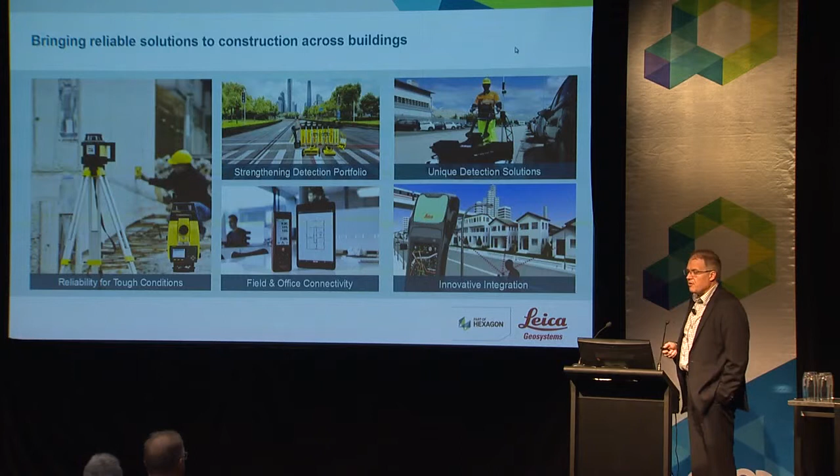We have a significant and growing business in the building construction market, particularly in North America and in Europe. So rotating lasers is one of the areas. We have small measuring devices, distos, and a line of total stations and software that we'll talk about in a minute that is also unique to building construction.

We are in the heavy construction business, so machine control as well. And really one of the most exciting things for me is the opportunity to get involved in some of the disruptions in the building market and to engage with the customer set that I've been working with my whole career around the building construction market there.

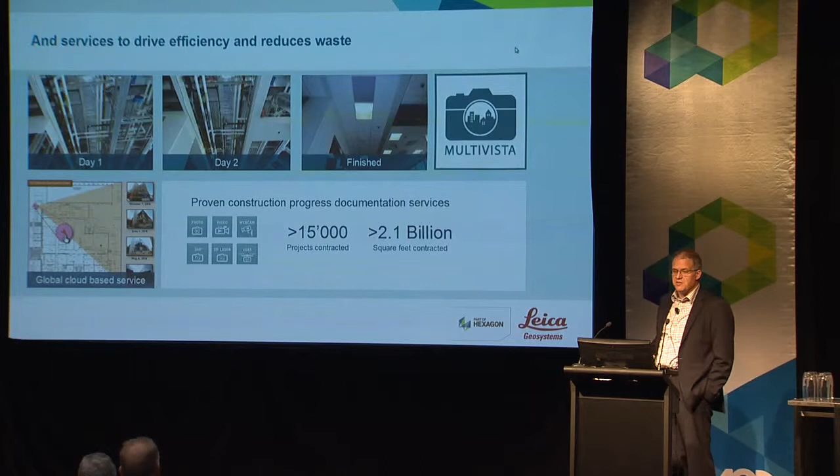We have other companies like Multivista, a sister company that does construction documentation and captures reality in different ways through a set of services. And I mentioned one of our sister companies, PPM, has - you may start hearing about things like Hexagon Smart Build, which is a little bit of a building-oriented product as well.

So that's enough about us. We are partnered, Leica Geosystems is partnered in Australia with C.R. Kennedy. And really the team that I would point you to here locally is on the right here, so the team from C.R. Kennedy. I would encourage you, if you have interest in talking to Leica Geosystems, then please talk with C.R. Kennedy. They're our reseller here locally.

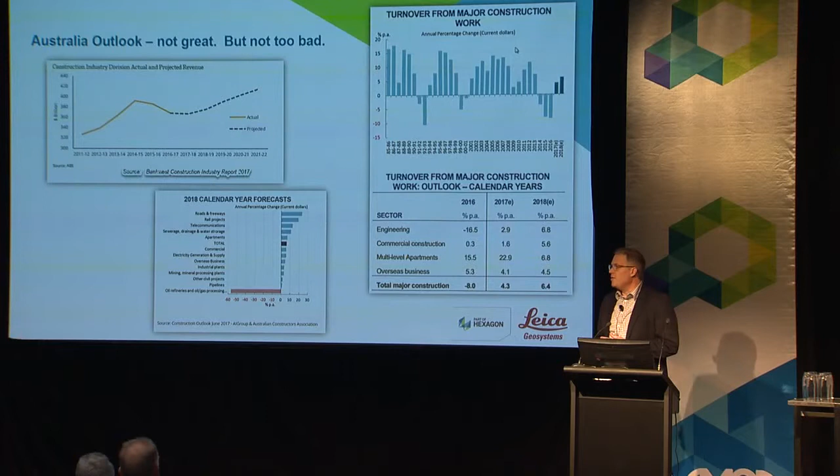So what's the challenge we're talking about? What's the need for smart change, and what's the challenge particular to the Australian market? I've tended to look, especially since I lead the North American business, at the particular challenges of the North American market. So in prepping up for this talk, I got a little bit of a study into the economics of your market down here. It was interesting, just in North America, I'll talk about that market a bit.

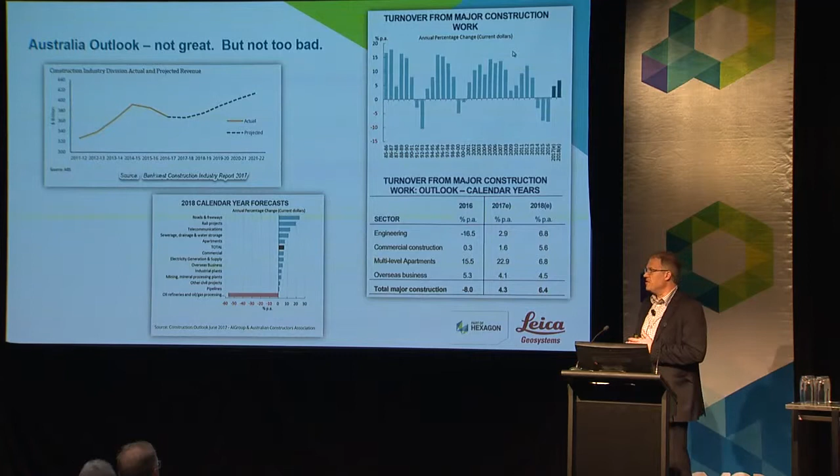The building construction business is going full steam. Tyler talked about the amount of backlog they have. Most builders you talk to in the US are so covered up with work they don't know what to do with themselves. The challenge, of course, is around finding enough labor to do that, and we'll talk about that a bit.

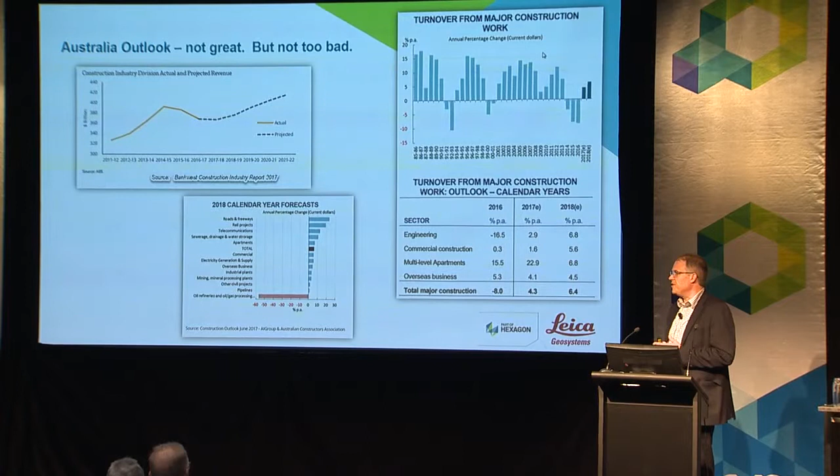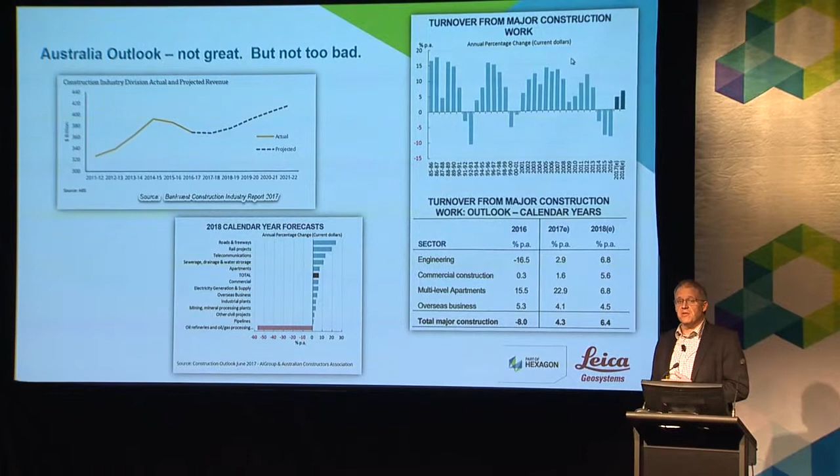I found some confusing notes on the Australian market. One report showed real concerns about the residential high-rise market, but others show it's not gangbusters like maybe it is in the States in terms of growth patterns. We were coming off a pretty bad several years, so we have a lot of backlog of demand there, but it looks like you're growing, and growing consistently. Looking around Melbourne, I noticed a number of cranes in the sky, and it seems like quite a healthy building market moving forward.

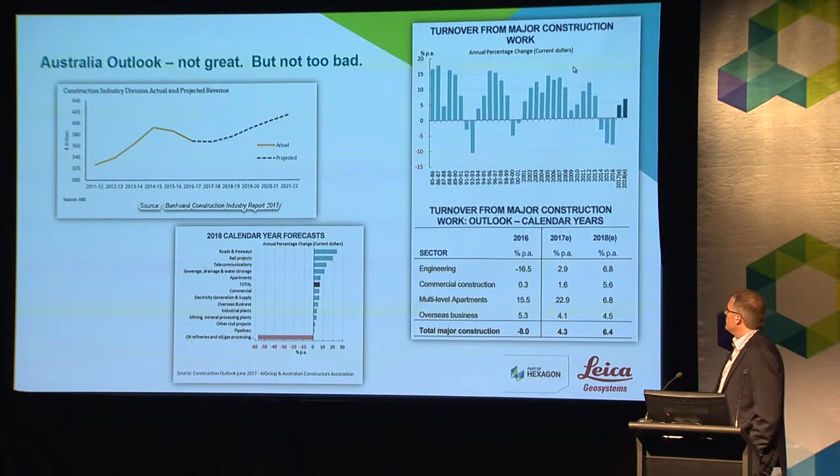Paul Teicholz had studied this a couple different times, in 2003 and again in 2013. Then it was looked at across the mature economies, and it seems to be a pretty consistent theme across these economies that we're not getting the levels of increase in productivity that we get in other industries.

And then this 80-20 rule usually is 80% of the progress, 20% of the work to get 80% of the progress, what have you. This goes back to the point that 80% of our major capital projects, at least according to the reports we've seen, tend to go over budget.

I know we're suffering from that in the Southeast US with a couple of nukes that are now getting shut back down because they were so far over budget. And they tend to run at least 20% over time as well. We know that, and I'm just going to say maybe we do have a problem in this industry in terms of how we approach things in the field.

We know it's hazardous to the people. It can be. We've made great progress over the last 20, 30 years in terms of bringing that hazard level down. But I think maybe even more concerning, is it's hazardous to the health of the organizations that are involved in this business.

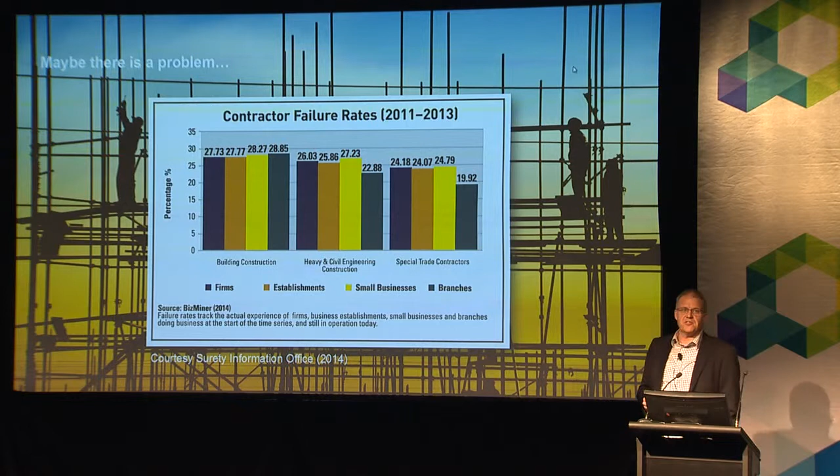This study I saw pulled some data from BizMiner. It's from the Surety Information Office, which I believe is a U.S. entity. It showed that over 2011, 2012, 2013 - not a bad time to be in construction - the failure rate was between 1 in 4 and 1 in 3 construction firms, offices, whether larger or smaller firms. There's a really high failure rate in the business. And the question is, why is that?

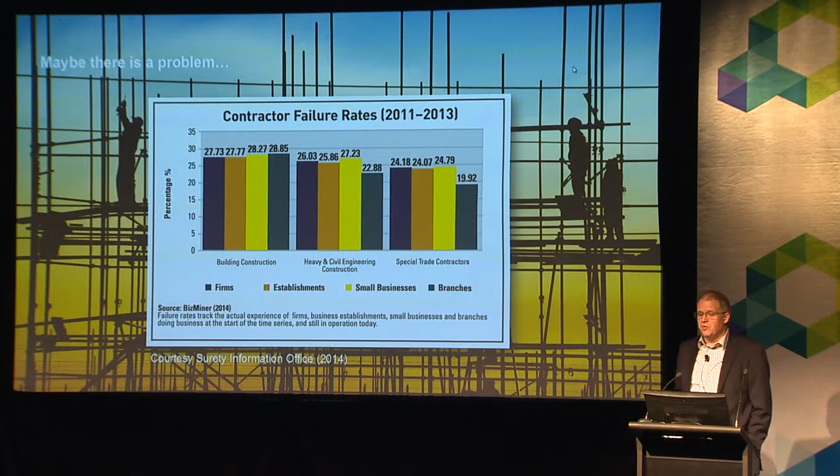So maybe we do need to think about shaping a smarter process. The World Economic Forum with Boston Consulting Group has done some studies of what they believe are the megatrends facing the industry, and I don't want to go into all that. It's an interesting report - I encourage you to download it and read it. I think it's freely available.

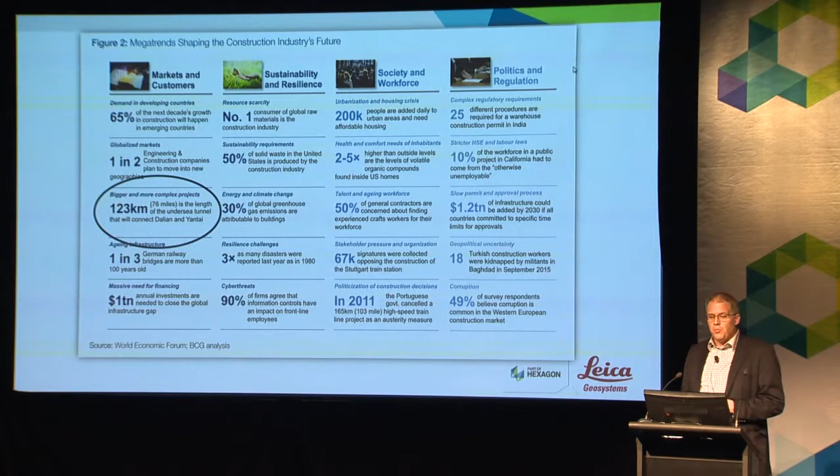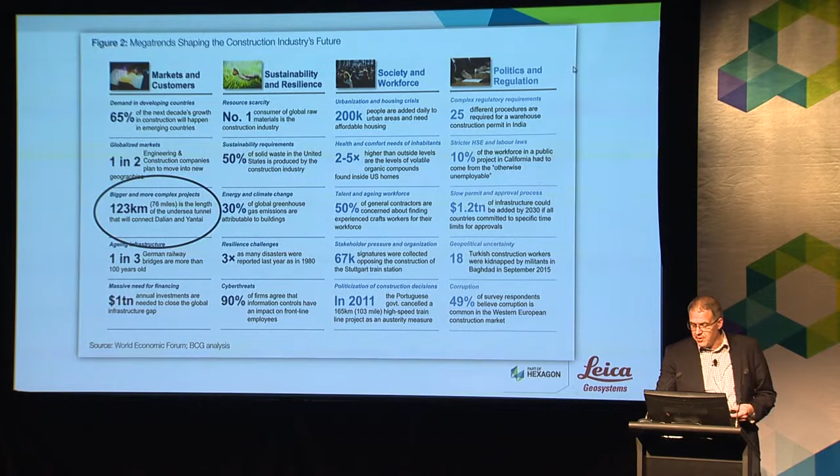But a few things I would point out - I've seen it with the projects that have been presented here. Larger, more complex projects certainly are part of the norm in this business, and it's getting more and more so - like the really impressive project you talked about up there in Brisbane.

Resource scarcity - we're the number one consumer of raw goods, and I'm going to add to that the labor scarcity. So in spite of the fact that maybe we're not growing in some markets as fast as others are, how many of you are concerned about where you're going to get your skilled workers in 5 years? Nobody concerned about that?

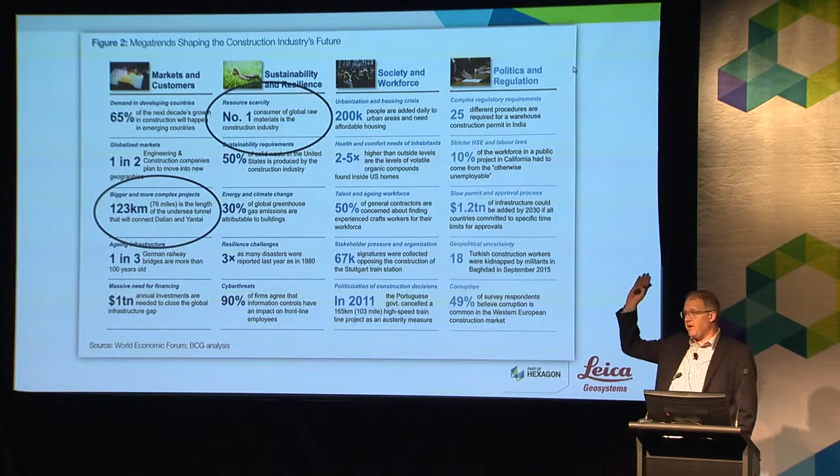In the US, you ask that question, about 85% of the hands are going to go in the air. 4 or 5 years ago, wouldn't have gotten the same kind of response.

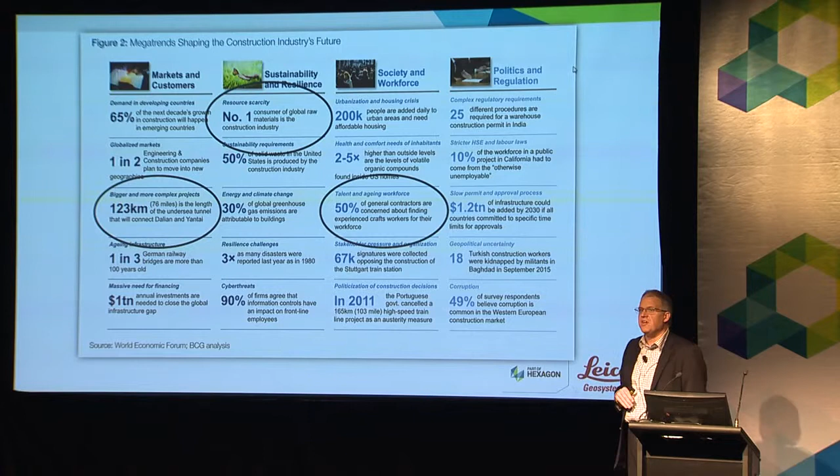So I'd say something to watch is, where are we going to get the resources to actually build that next generation of projects? And that's right here in the aging workforce. About 50%, actually the number this year was like 72% of GCs were concerned about that. I was talking to one of the major contractors in the States that was tracking their average workforce age, and they said it was going up by 1 year every year.

Houston, we have a problem. Actually, that sounds bad these days because Houston does have a problem. They're covered in water, but we have a problem.

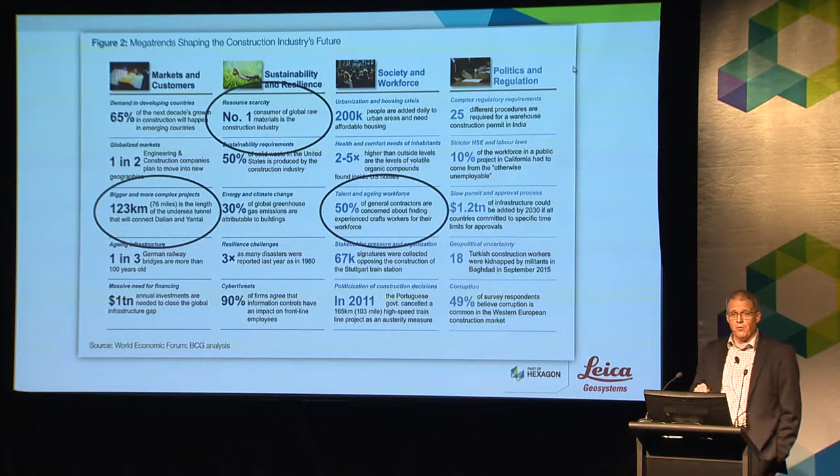If that's going up at that rate, because they also analyzed and saw that 50% of their workforce, their skilled engineering and skilled trade workforce, would be retiring in the next 5 to 10 years. So they were looking at a cliff of what's going to happen with their workforce.

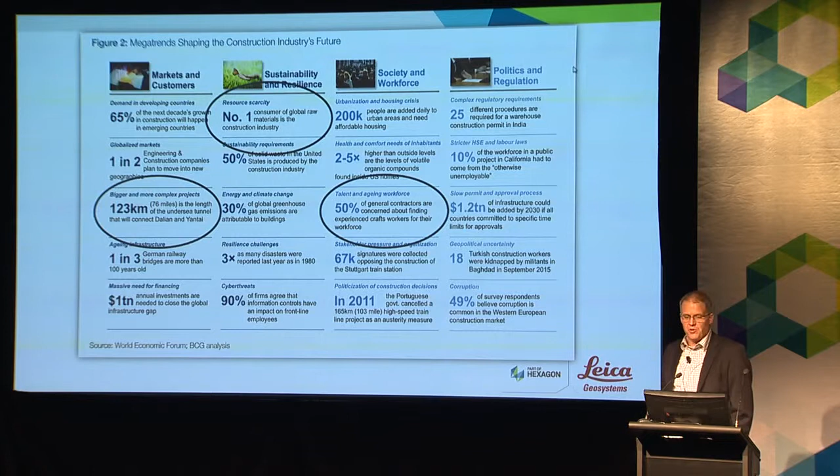So the question is, how do we do this better? And this is where, after listening to the presentations yesterday, I was up at 2 in the morning with jet lag and a little existential challenge to myself here. Because I come at this as a technology vendor. I've been doing this for a long time. I left industry in the late 90s. That was the last time I was actually working on a construction project directly. So that's my ivory tower right there that I get to be in.

And the question I was asking myself is, what do I bring to this discussion as someone who's kind of been working around an ivory tower around the world? I don't think we introduced it, but I spent the last 10 years of my career with Autodesk. The last 5 of that was in a strategy role globally for Autodesk in the construction business.

So last night about 2:30 in the morning, I started thinking, well, what do I bring to this? And I had this app search my Google Photos to see where I've been. Over the last 5 or so years, I've spent a lot of time moving around the world, and anything outside the States and a lot of what's in the States was on business trips talking to construction contractors around the world. I was reflecting on this experience talking to industry groups and contractors around the world. I apologize, it was 2010 before I had Google Photos, so many apologies there.

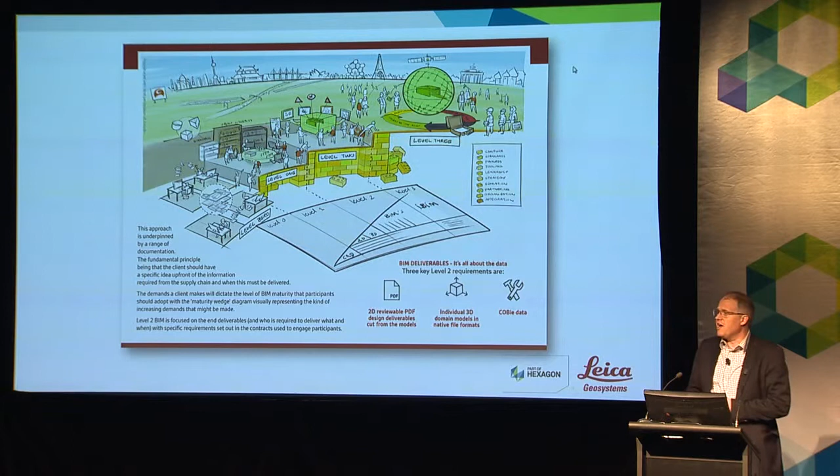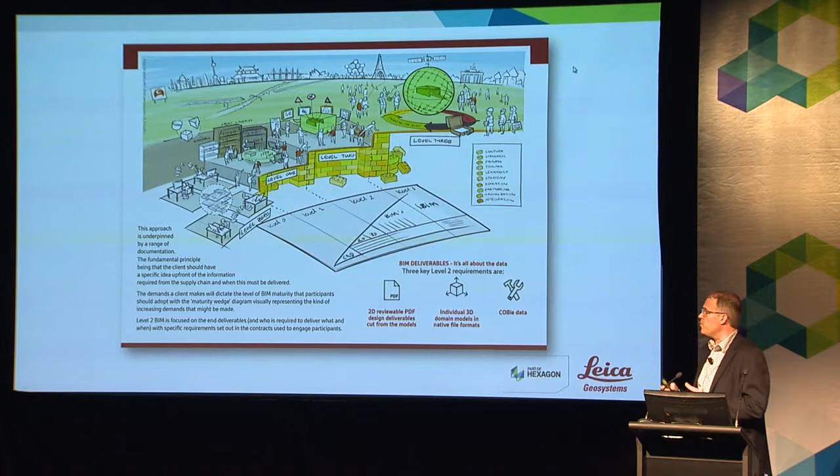In the UK, of course, we know about BIM Level 2, and there's been one approach of a top-down influence of the government, saying it's an owner pull of deliverables of what they expect from construction contractors. They have a vision for what they're going to get out of BIM, and hopefully everybody's familiar with what they're doing.

In Central Europe, there's a group called the 5D Initiative, several German contractors working together, and I was engaged with them for years. They had a very different approach, specifying in great detail exactly what they wanted from every step along the way, and planning what was going to happen. Interesting effort, really planning out the workflow and process that was going to happen with BIM.

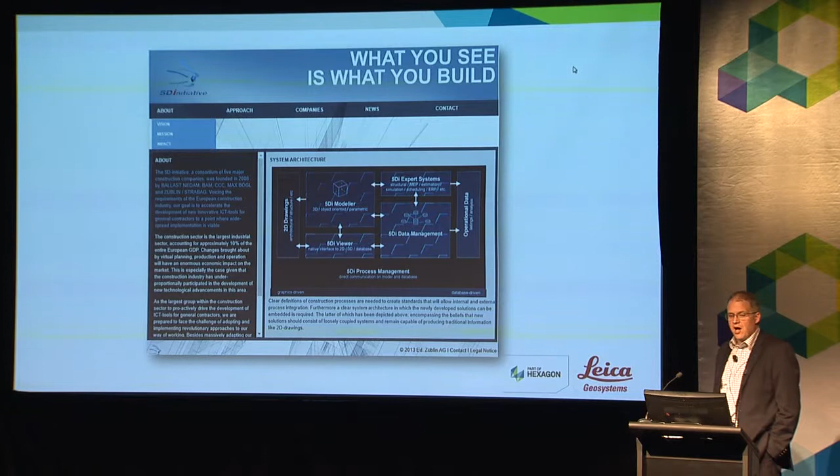And some progress got made. I think some of the companies in that group innovated a little faster than maybe the group was able to innovate. And then there's the United States, and it's not just because I'm a Texan by birth. We have quite a cowboy culture of little bits of innovation. You've seen what some of the different folks are doing in the States, and some heroics as well. But we tend not to have this organized way of saying, okay, what are some very specific things we can accomplish to move the industry forward?

We have people showing off how they're putting a VR helmet on and showing how they do this, and it drives everybody forward. But it's definitely a cat herding exercise.

I couldn't find a good cartoon on that.

Reflecting on my observations around the world and what I've seen from the group yesterday, and the way we've done the specification here for what we want to accomplish as mechanical contractors—not just mechanical, MEP, we have E as well—I think you're doing pretty well in terms of trying to really accomplish a business result. And I applaud that. Hopefully you'll continue those efforts forward.

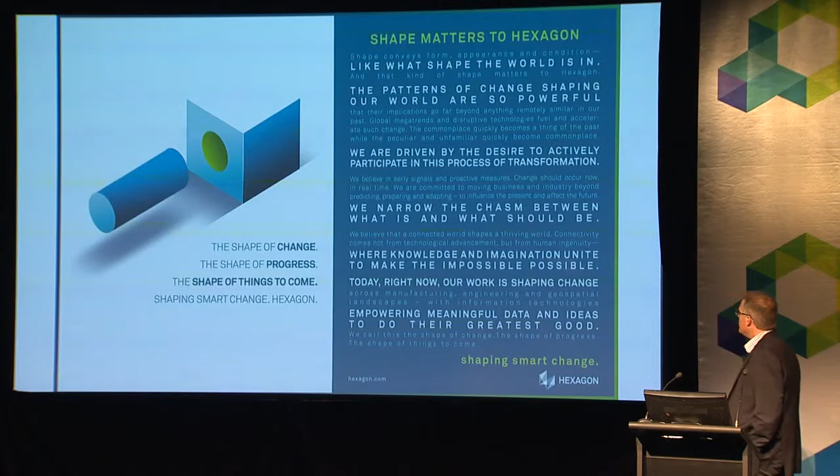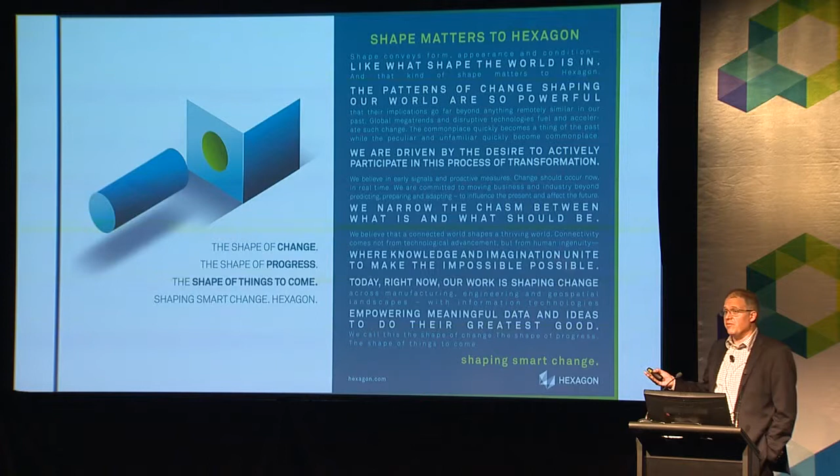Now back to Hexagon and shaping smart change, and shaping a smarter building process. Our corporate slogan is shaping smart change. I really like how we're thinking about this in terms of the shape of things—not only with geomatics, scanning, and the metrology businesses, the other ways of measuring things—but how we put the physical and the digital together with intellectual resources to really help move folks forward around the shape of things to come. I wanted to incorporate that into how we can shape a smarter building process.

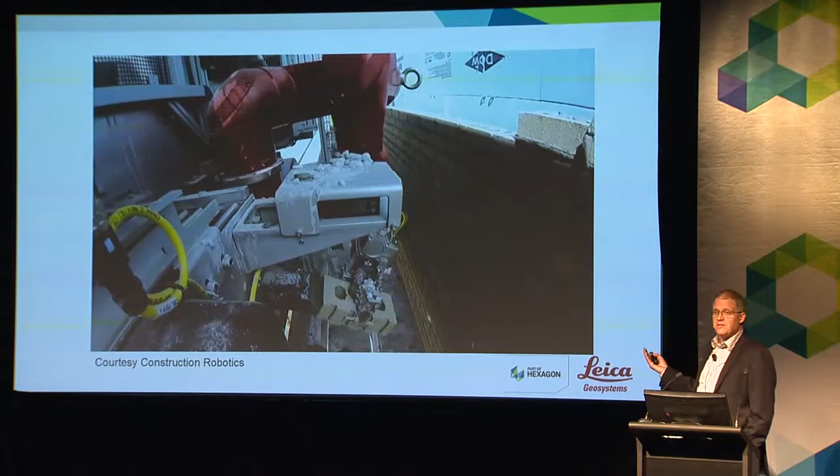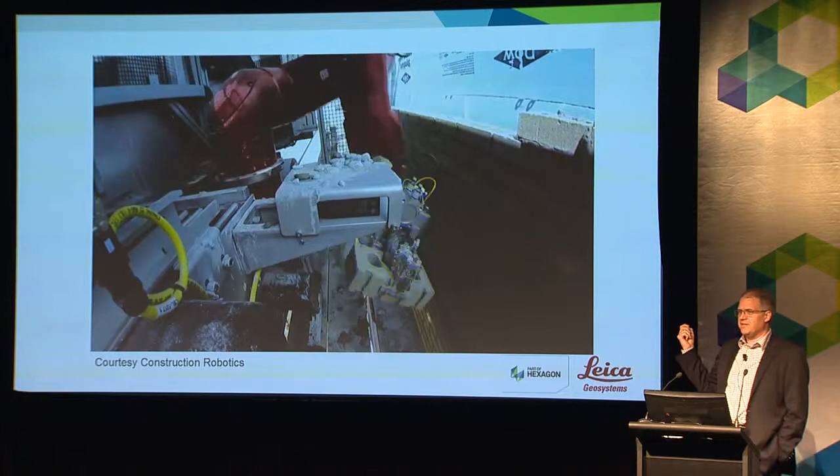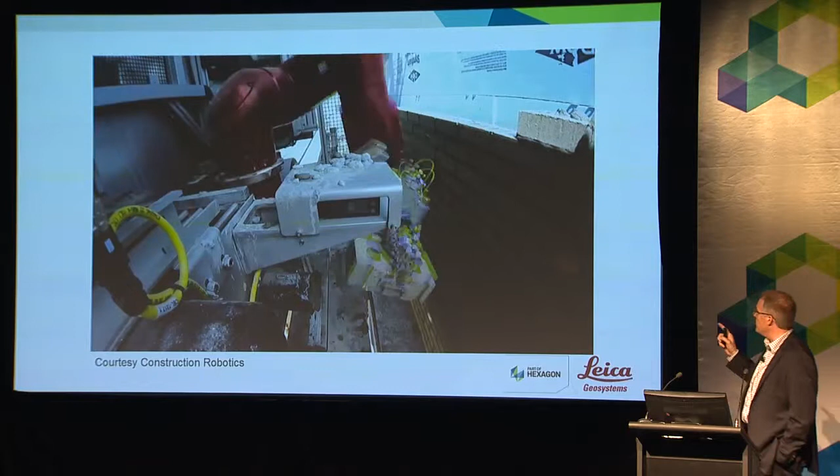So how might we go about it—what does a smarter building process look like? Is it bricklaying robots? I've heard a lot of angst among folks in the masonry business about this. Everybody's seen this, right? I know the guys who have this company, and their vision isn't really to replace the mason—they're augmenting masons, because it turns out robots are really good at picking up bricks and buttering them and sticking them up there. They're not really good right now at making it look good, at striking. But the masons are really, really good at that.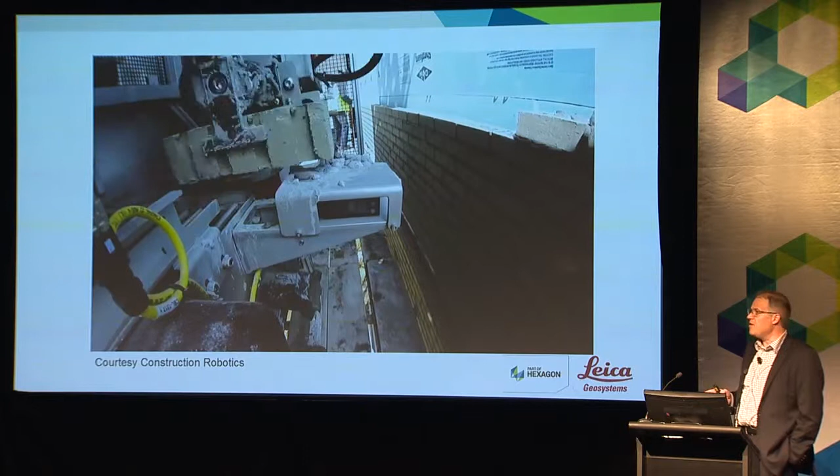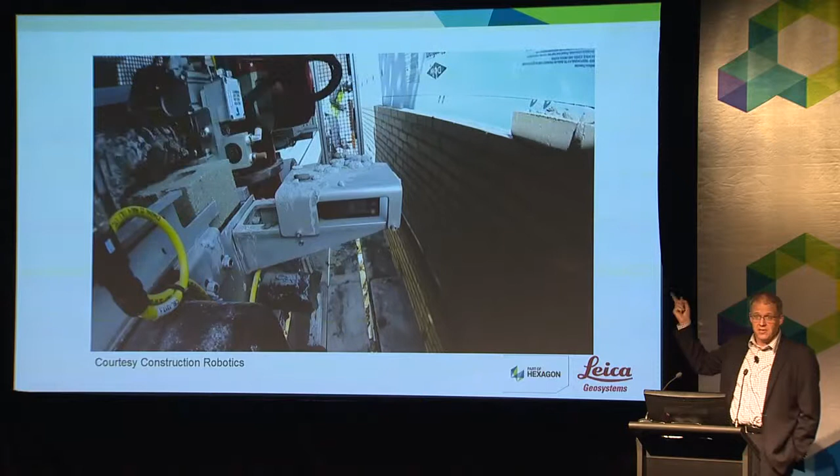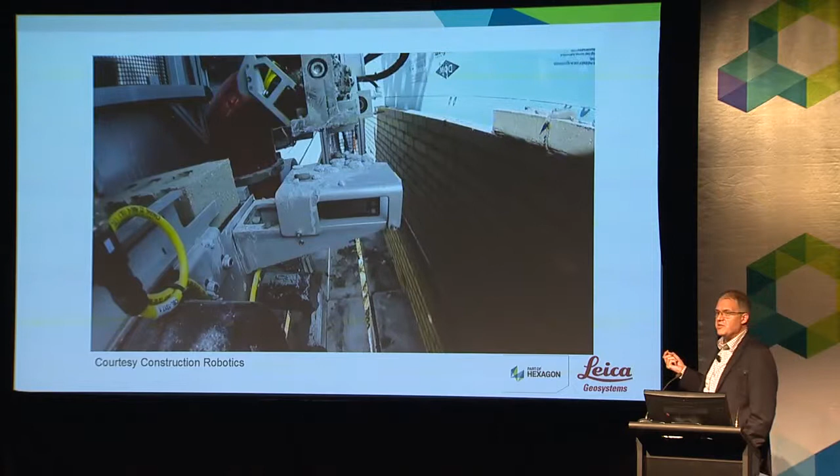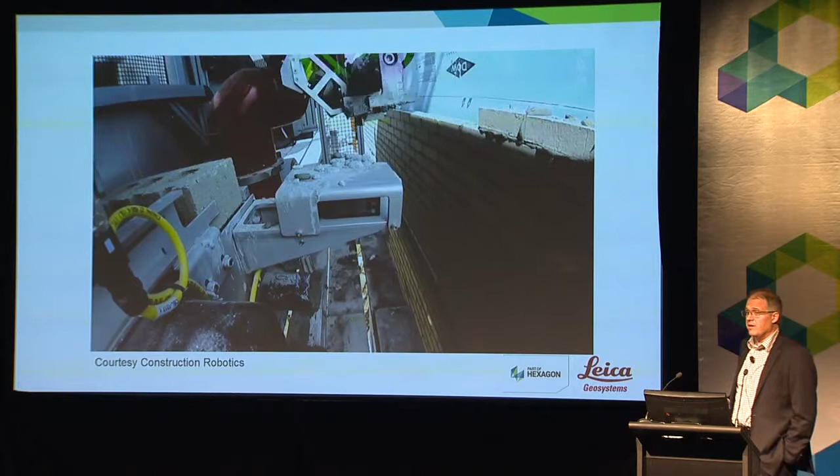But remember the aging workforce? Remember how we're going up by one year every year? Well, picking up unit masonry—not just bricks, but bigger blocks and other sizes—really wears people out over time. So how can we start to bring technologies to bear to augment these workers, to extend careers, to let them do the art and not just the backbreaking work of moving bricks? Maybe you're eliminating some of the lower cost employees who just bring bricks to the guy putting them on the wall. I think that's one of the interesting ways—maybe that's a smarter, new shape of construction.

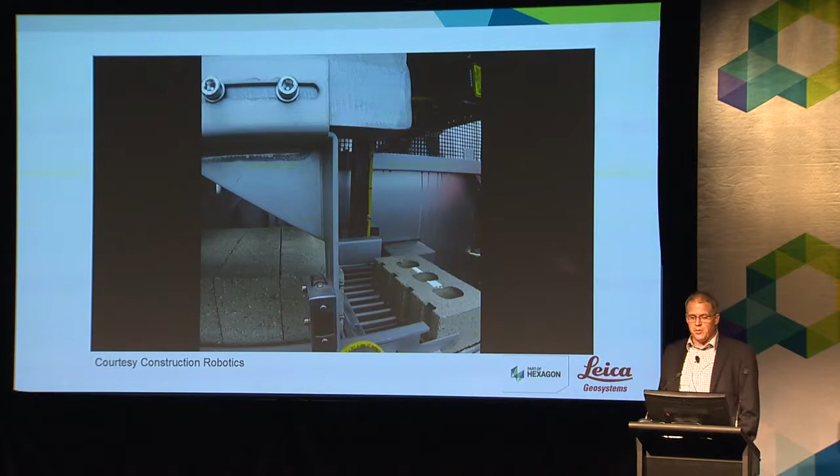I went to Dubai a year and a half ago, and right before I went, Sheikh Mohammed announced that they're going to 3D print 25% of their office buildings by 2030. The project I had earlier was in Dubai. How many of you have worked in the Middle East, in Dubai? Okay, a little bit of a chaotic work environment out in the field, right?

I went inside a project I won't name—one of you may have worked on it—but it was a large civic project there, and I could not believe the cables everywhere and the scaffolding that was willy-nilly. I thought, how on earth are they going to go from this chaotic, messy, low-skilled workforce construction process to 3D printing 25% of their buildings by 2030? But the week I was there, they did evidently 3D print their first office building—the world's first 3D printed office building, as they said. So a little bit of progress there.

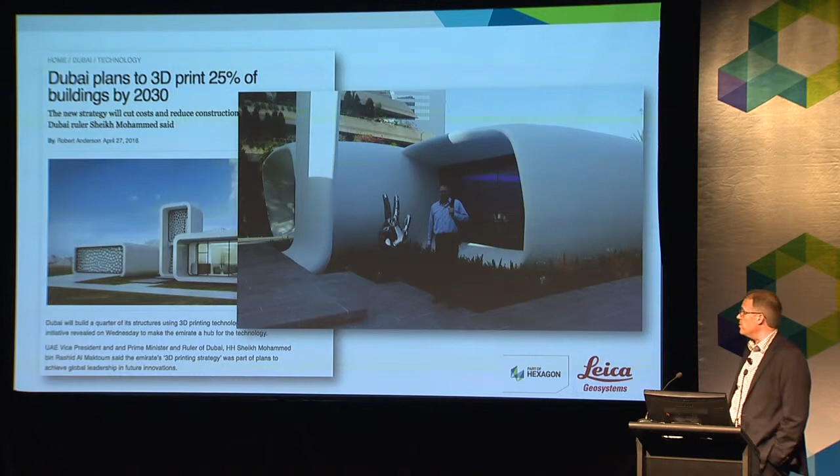Maybe 3D printing is—and I think it is—part of a smarter building process that can take some of it out. But all of these are evidenced by this trend toward digitization or digitalization. One time I spent three hours in a debate over the syllables, so we'll just go with digitalization.

In construction, the question I think we have for ourselves is what does that mean to us, and how do we enact these things, and why, and how fast can we move in that way?

After a year or so of talking about digitization and digitalization, I decided I would look up a definition, and I found one on the web. I'll read it to you because it's more fun to read this one. Digitalization is the integration of digital technologies into everyday life by the digitization of everything that can be digitized. I did not make it up, you can Google it. I couldn't make that up.

So I like this one better from Gartner, which really talks about the two pieces of changing your business models. We've heard about that from a number of people in this conversation. I think I would really challenge you to think about your business model and what does this mean to your business model. How do you add new value for your customers? How do you add new value for your stakeholders? That's really what I think keeps me up at night, and what I hope will be keeping you up at night moving forward, not just jet lag.

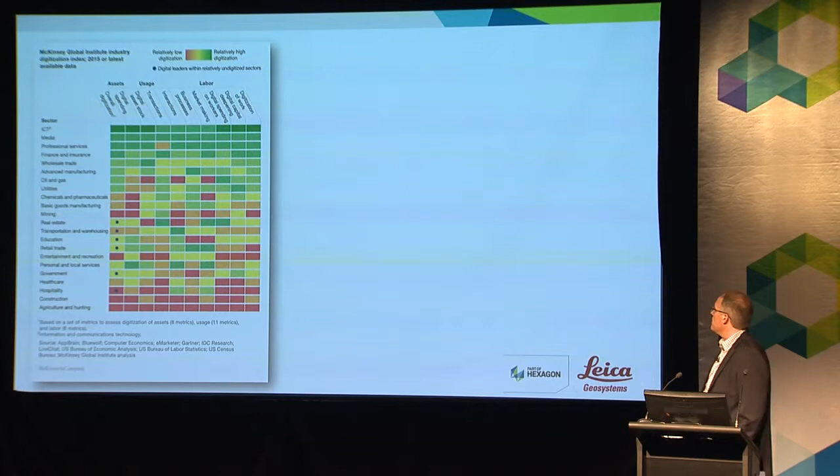McKinsey, we saw a little flash of this, I think it was in Frank's presentation yesterday. They did a report on the digital index they came up with for various industries, and it goes from IT all the way down through oil and gas. So oil and gas is pretty high, mining is actually pretty high in terms of their use of information, of big data, to plan things out. If you keep going down and down, you'll find construction right here at the bottom.

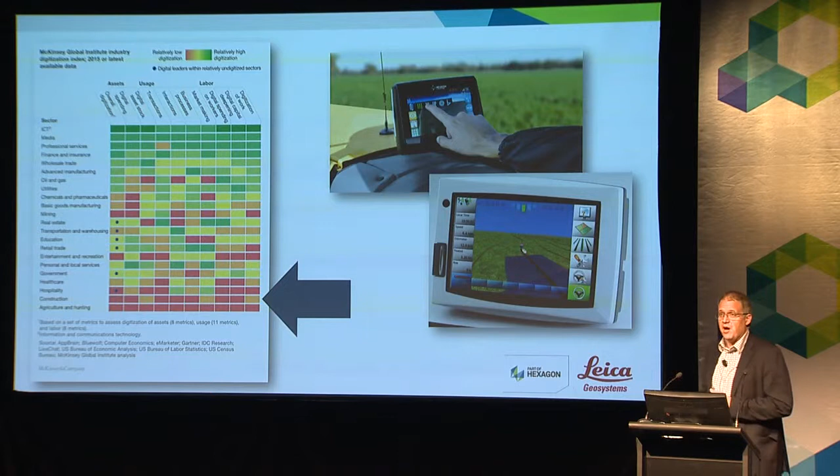I hope you find it down toward the bottom, right above agriculture and hunting. Thank goodness for agriculture and hunting, and thank goodness for the hunters, because I think if you took hunting out of this equation, we'd probably find that ag is ahead of construction in the use of things like artificial intelligence, big data, analytics, sensors, to really make decisions about the best way to apply resources. In fact, I can tell you they tend to be well ahead of construction in this area, at least in developed economies—other parts of the world, not so much. So thank goodness for the hunters, because they're keeping us out of last place.

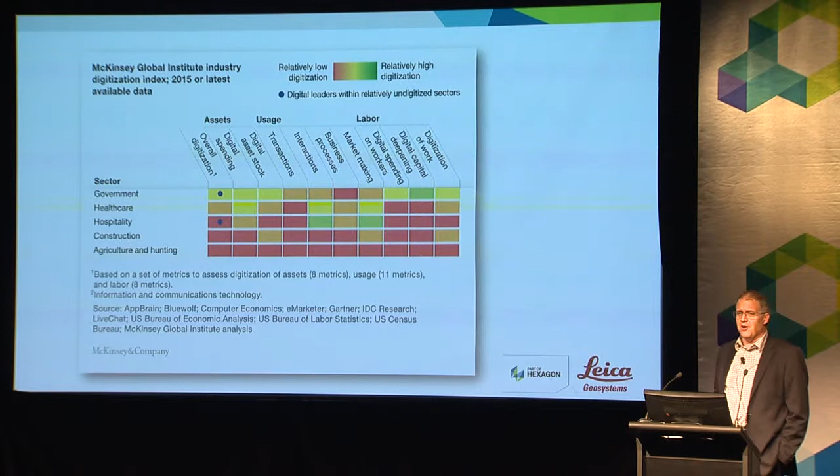If we really drill in on this a little bit about what they're talking about, it's things like how are transactions formed, how are markets made. Those are challenges to the core way we do business. I don't know what it looks like here, but I know in the States there's a bid process that goes on to come up with the price, and then there's kind of what happens after the bid to really come up and find fee or find margin, to bring the subcontract prices down a bit more after we've established that, so we can find a bit of fee in there.

It never happens, right, Tyler? No. All right. Oh, never. Okay.

But a digital market would kind of take that out. It would kind of perfect that—really to the benefit of whom? I think the owner, in the end.

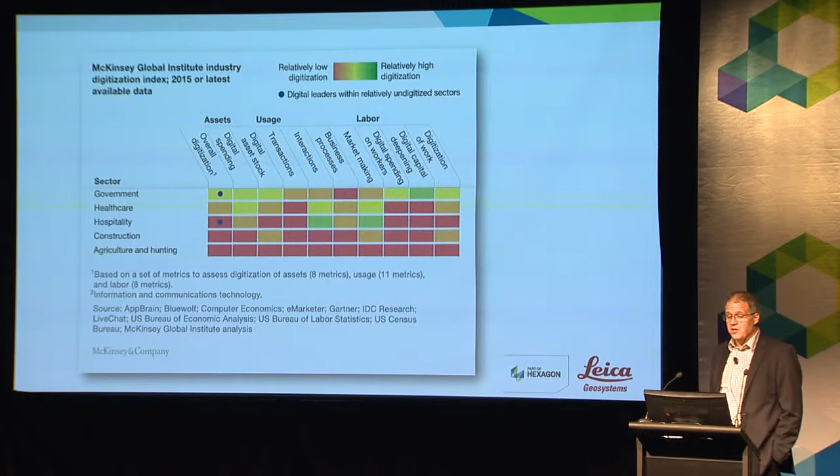So what are the different processes that go on in terms of digitalization? We see some evidence of that in various ways. We know we have smart cities, smart roads, we have the use of drones. How many people are using drones in their workflows here now? Three or four? I think everybody in the States claims to, now that you can get a pilot's license—I'm not sure how many of them they hold on to or how many they put into the drink. But there's a lot of innovation going on in that area.

We saw the bricklaying robot, or the assistant robot. Big data analytics—I know I've seen a number of you with some presentations that look to head that way. But then how do we get away from deterministic reporting of information and letting the computer start to find patterns and help us make decisions?

And then things like 3D printing, which is going to really, I think, over time go away from making little plastic things to making housing and other things in a way that's far more efficient than we can do today.

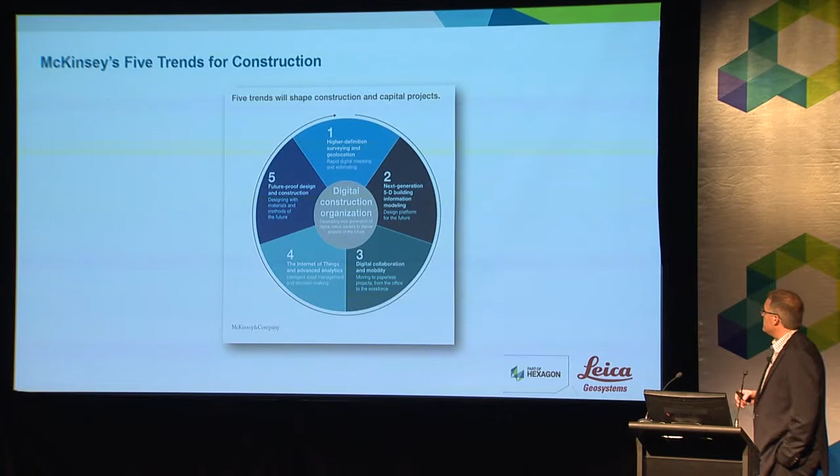McKinsey—apologies, the second time you've seen this graph this week—mentioned 5 trends that'll help get started on that way. Higher definition surveying and geolocation.

If we're going to start to bring the digital and physical together, we have to do that in a way that really helps them marry up in a precise way. So that's one of the reasons they're starting here with this aspect of it. It's one of the things that excited me about the move to a Geosystems business: how do I really start to connect the digital and physical and get out of my ivory tower and get my boots dirty again.

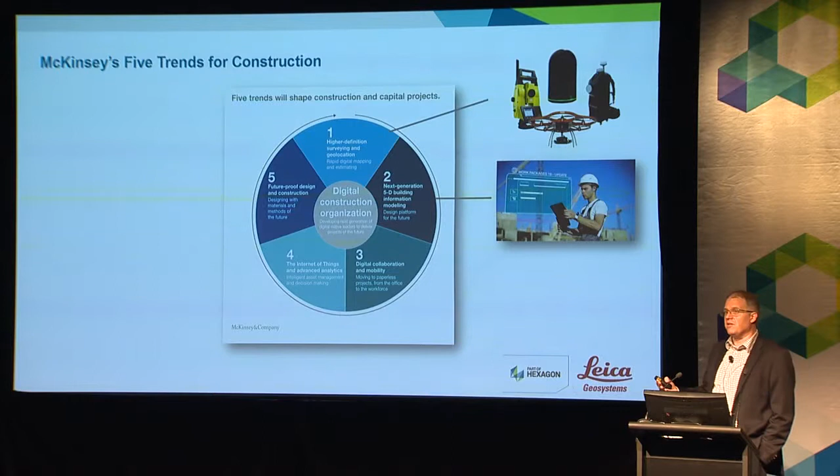Next generation 5D BIM—I would posit that a lot of what we're doing here around the world in terms of BIM is really still 3D. I still hear a lot of people talk about clash detection as the value they get out of BIM, and no doubt there's value in finding issues before they get in the field. But how do we really connect this together into an end-to-end, supply chain-led, manufacturing type process the way we might do in another business?

Digital collaboration and mobility—there's fantastic tools out there, and this is an area that has had huge uptake in the last few years.

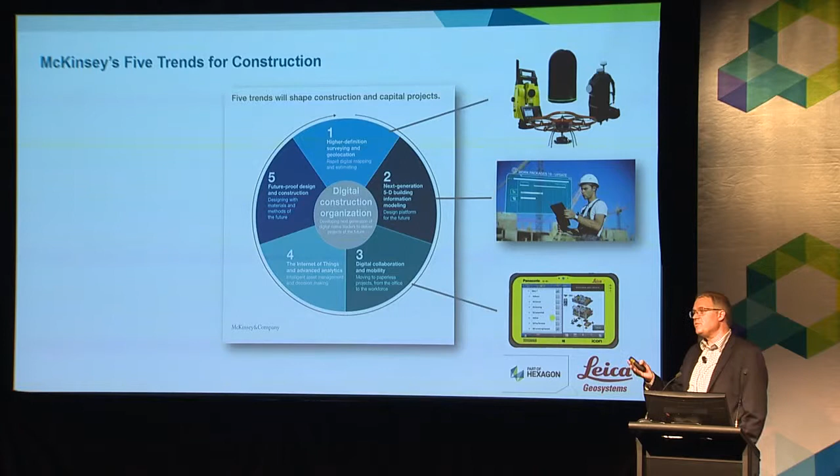When the iPad first came out, I would go talk to customers and say, well, maybe we should put something on the iPad. We ended up buying a company that was in that area, and a number of customers said, I would never use that on a construction site. What if it gets broken? And I think now most of us say, so what if it gets broken? We'll get another one, right? It's not that expensive an asset.

So really connecting the people in the field—I heard one of the last speakers talk about their iForms that they were using out there in the field, which is, I think, a fantastic way of trying to capture the information right there at the point of construction.

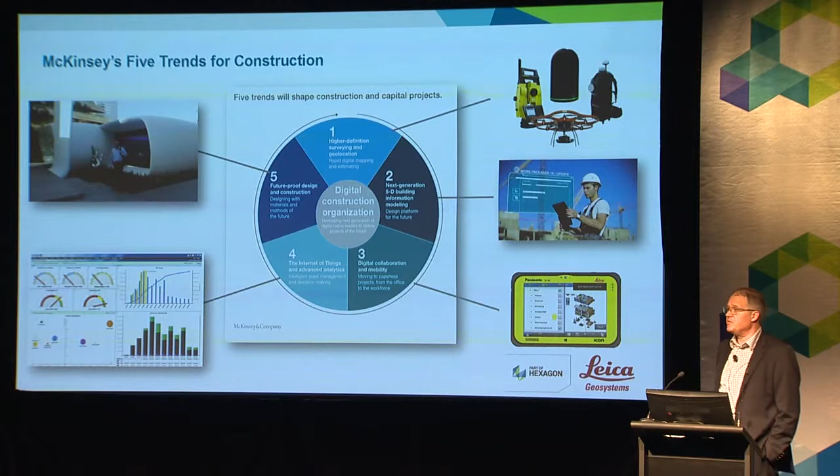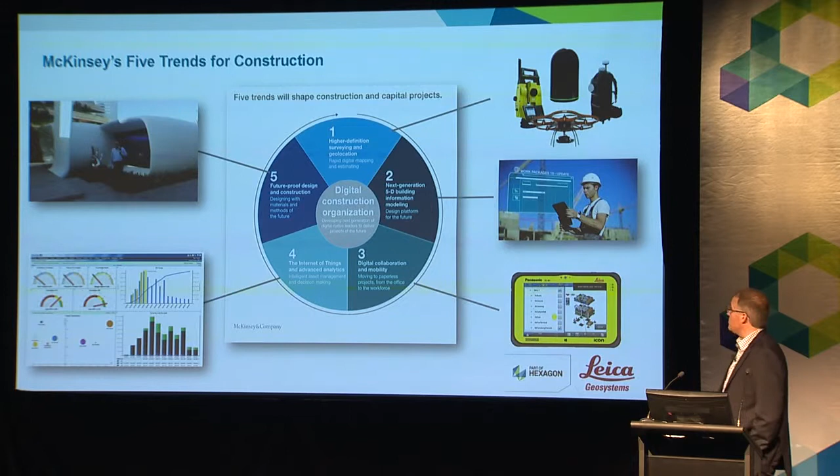Internet of Things, advanced analytics—you're going to see a whole lot going on in the next few years in that area. And then also, what are the future-proof, new materials that can come on? I've met with a few cement conglomerates around the world, and there's a whole lot of effort going into new types of materials that will be far more resilient, far more able to handle the stresses of the environment, and possibly even contribute a little less to the destruction of the environment over the years.

But before we strap on our whole bunch of sensors and start heading out there in the world and capturing that, what I want to do—and this is kind of the core of the talk—is talk a little bit about what are the elements of digital transformation. If we're going to shape a smarter building process, how do we get really started on that? And what do we need to worry about?

If we are going into digital transformation—and I heard it yesterday with a couple of talks—if we're going into this digital transformation and not putting our customer experience first, I think we're missing the point, because somebody out there is, and they're going to be the ones that succeed.

How do you start pivoting that into operational agility? We'll talk about that in a moment. Culture and leadership is an absolute must. When I hear people that are trying to get a digital transformation movement going and they have no support of their leadership, they're sunk. How do you enable your workforce? In construction, that is such a critical link when 90% of the money spent in construction is actually spent with a workforce out in the field or back in the factory.

And then there's the digital technology integration. So much of us that are kind of digerati or into the technology want to start with the tech and then go apply it.

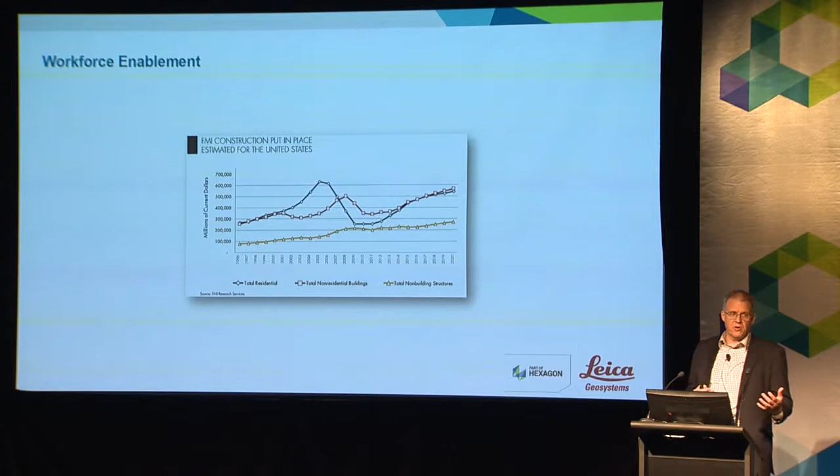And then workforce enablement. When it gets to construction, even if you're a main contractor and say, well, I have 2,500 employees but I don't self-perform anything—well, in reality, you have maybe 100,000 employees you're working with, because you need to enable that workforce, which includes all your subcontractors as well.

So this is a look at what FMI, the Fails Management Institute, is projecting for growth in the construction market in the States moving forward. Just pointing out that, not yet in real terms, have we gotten back to the peak of 2007. That's the point of this.

Yet, if you look at the number of employees involved in construction, we are far short of that, right? So we were close to the peak in real terms of output, but far short of the number of employees.

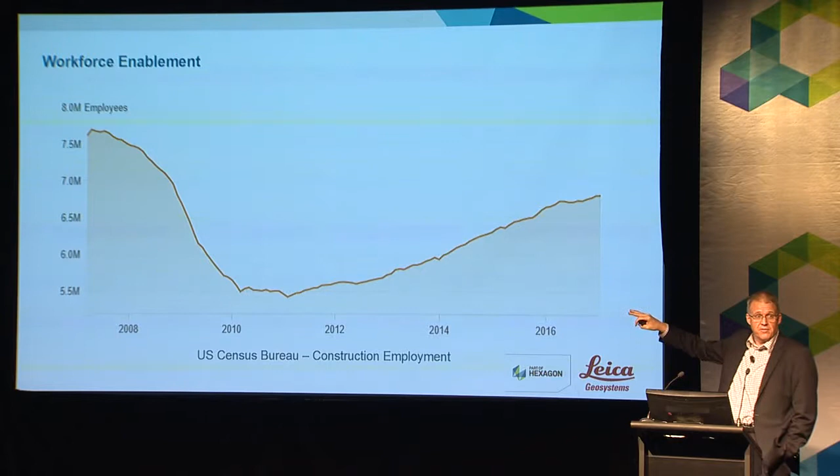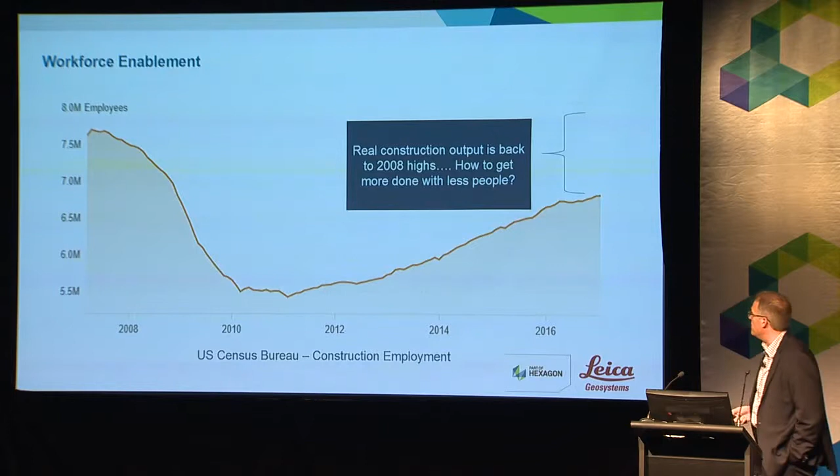So we have this gap: if we're going to keep growing the way they're projecting, how are we going to then do more with less? Again, it has to do with enabling your workforce to take advantage of the digital and connect that out to the dirty work they do out there in the physical world. Then it gets down to integrating technology, and that's always the fun part that we all get excited about. But at this point is where we start integrating technologies.

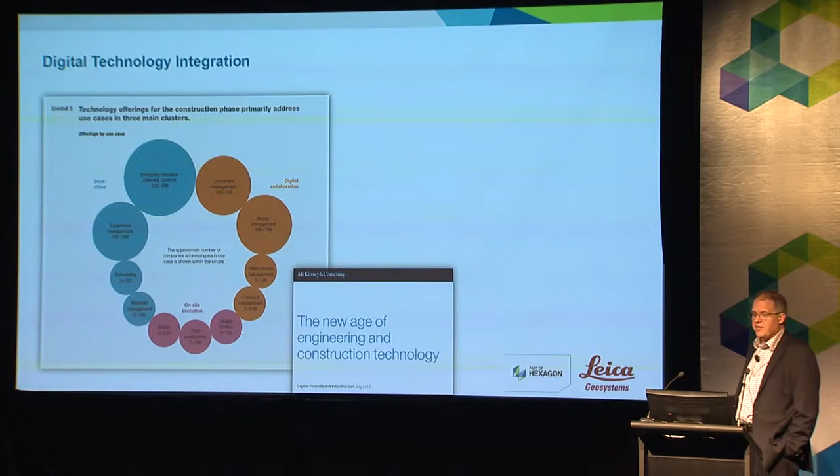This is back to another McKinsey report they analyzed recently, which came out in July. The size of the bubbles is the number of companies or technology offerings involved in different areas. Tragically, the biggest number of them is in things like ERP, kind of the back of house stuff that doesn't really transform our business. It just keeps up with where things are and keeping up with equipment. This report is called The New Age of Engineering and Construction Technology.

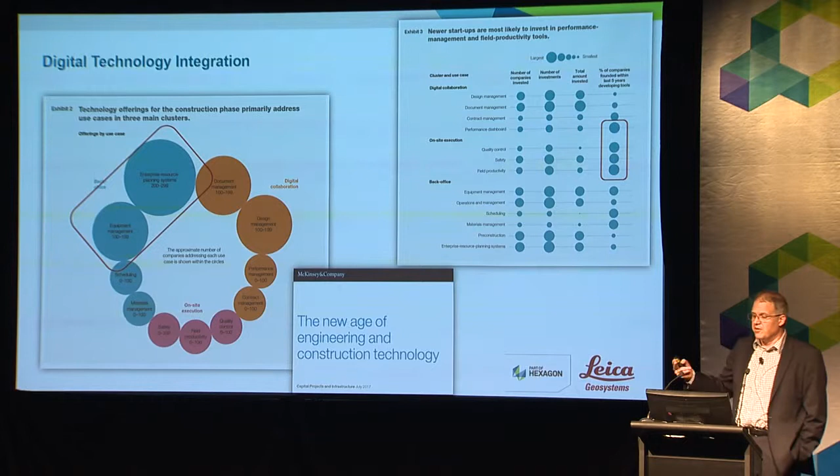Encouragingly, however, in terms of the ones that have come on in the last 5 years, the new startups, the bigger bubbles are starting to show up in things like on-site execution, quality control, safety, materials - the kind of things that happen on the construction side and really start to impact the way we do our work. So I'm encouraged by that.

But how do you get started? Let's go back to the first three that McKinsey put out there. This idea of higher-def survey and geolocation, reality capture and positioning - it's no secret that's our core business. This idea of really connecting the BIM processes to your work, to your supply chain, to the way you cost projects, the way you plan projects, the way you procure projects. There's so much to be done there in that area.

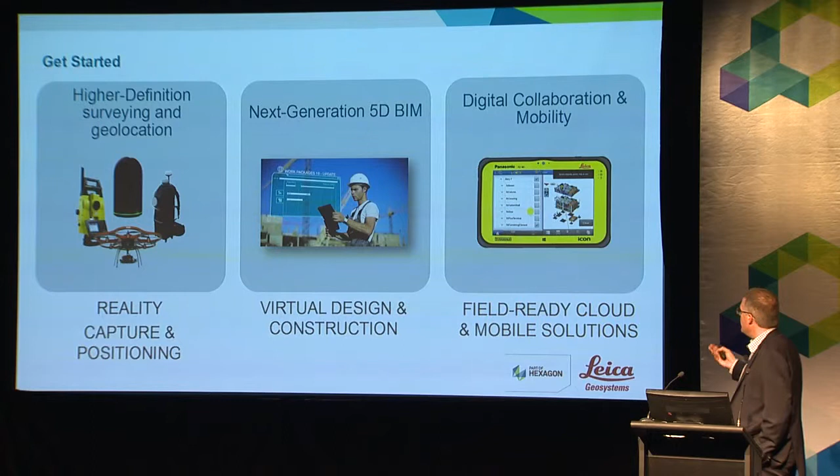And then obviously there's a wide range of specialized and general field and mobility solutions. But still, I think there's a gap between - how many of you are really office folks doing the BIM planning, doing the project? How many of you are field people out there actually running field forces? Okay, that's the gap I think we need to work on here, because again, 85-90% of what we spend in construction goes on outside the office. So we may have had a couple different strategies at play that have created a gap between the office world, maybe the ivory towers that maybe all of us are living in, and the dirty boots real world.

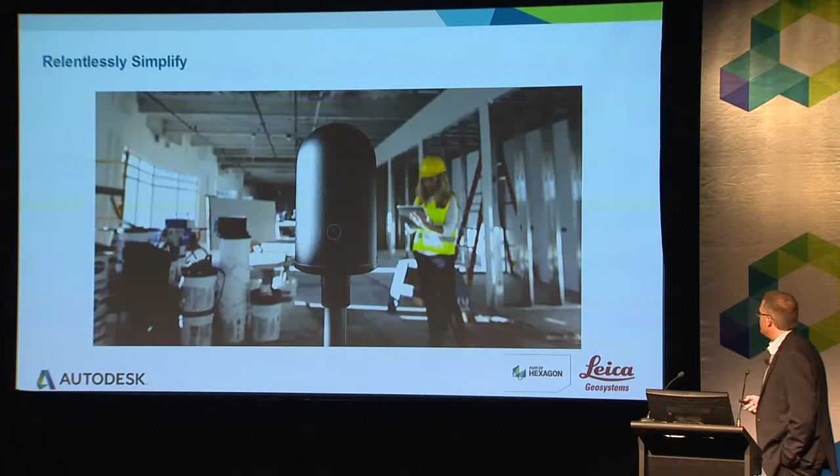One thing I would say: relentlessly simplify what you're trying to go after. We heard that earlier in the last presentation. That's one of the key things we were trying to accomplish with the partnership with Autodesk - how can we take something that really has taken a trained, specialized person, almost a specialized surveyor, and make it the kind of thing that is almost push-button easy, where even I, who knows nothing about scanning, could scan.

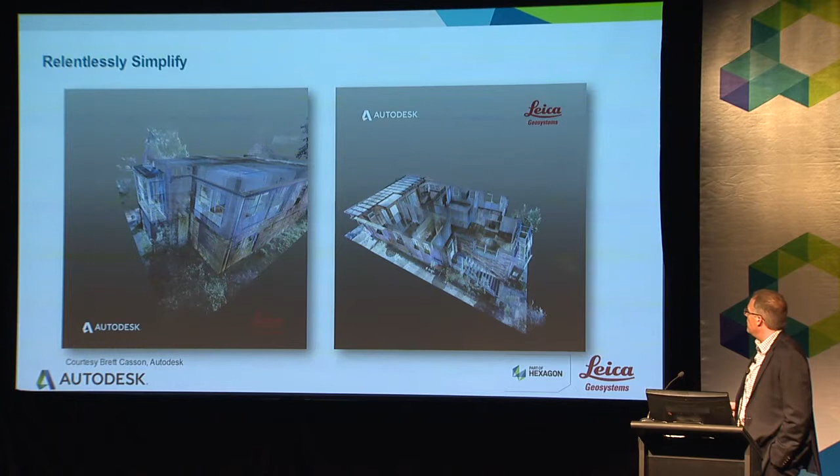So relentlessly simplify. Here's some great shots that were taken from Australia with one of the ones that's in market. And then what I loved seeing is the first customer that posted anything on YouTube, coming out of when they started getting the BLKs delivered in the States, was this Maxwell Construction out of Indiana.

I had to go look them up because I'd never heard of these guys. They're about a $25 million company, started in 1988. They're building things like La Rosa's Pizzeria, small projects like this, the kind of things you would never have probably thought to apply 3D scanning to, and they said, well, we're going to start getting out there and scanning the underground plumbing works to make sure that things are in the right place here.

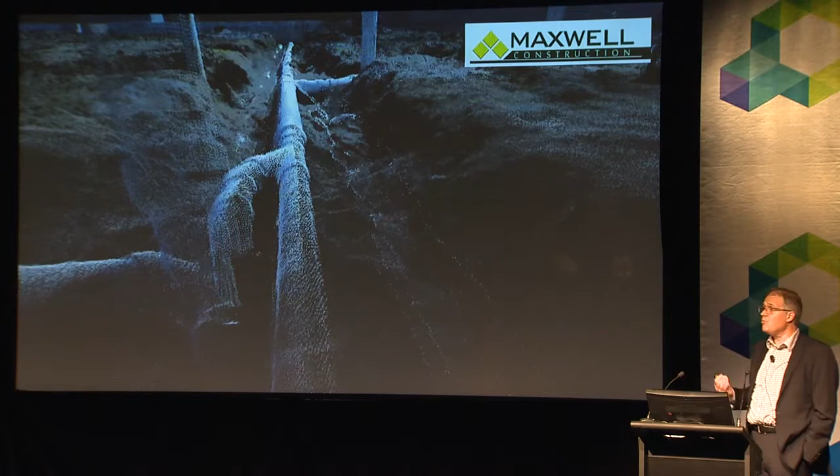The same way, 3 or 4 years ago, I was seeing people on billion-dollar hospitals do laser scanning and compare it to the model. So I love seeing that.

I would say relentlessly connect with the people in the field, however you're doing it. But let's start pushing the technology to the people in the field. Let's make it easy for them. Let's really let them take advantage of all this perfectly, wonderfully coordinated model. Usually it gets printed on paper and then processed through people's heads and then the tape measures to get things laid out in the field. So there's multiple paths to do that.

If you're on IFC, there's paths there. If you're using BIM 360 as your hub, like one of them was, there's paths there. So we're not the only game in town, but let's connect this stuff with the field. Let's really start to enable the people out there on the work site to use technology to do their jobs better.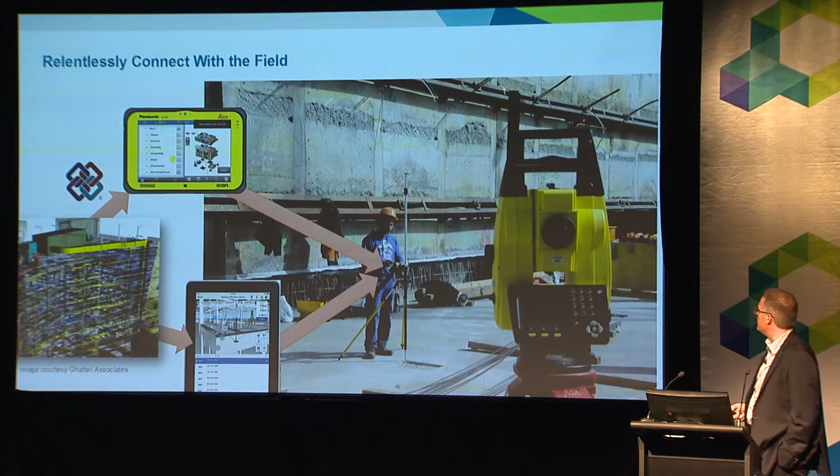Here's an example out of Canada, a company called Clark Builders — that was the guy that presented this presentation at our customer conference this year. Started out as a carpenter foreman, he became the head layout guy, but he's not a technologist. He just wanted to do his job better.

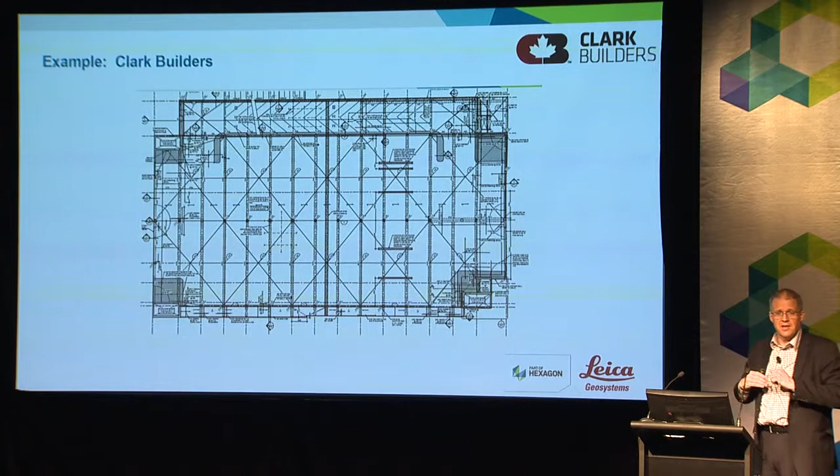And so he had this parking deck that was a pretty complex structure, because not only did it have the drainage that was required and that sort of thing, but they managed to specify that all of the slabs had to be equal thickness. No concrete, you couldn't have flat panel on the bottom. Everything had to be equal thickness. So he had to figure out how to lay this thing out.

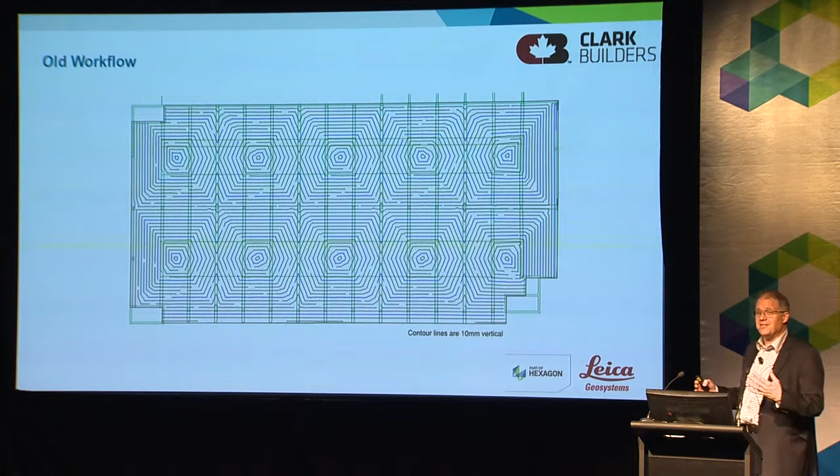And so the first thing he did was he said, okay, well, I'll just make a surface out of it. I'll make a TIN out of it, and I'll go out and use a dipstick and start figuring out how to do this. And they realized that that was just an approximation and they didn't think they could get within tolerance.

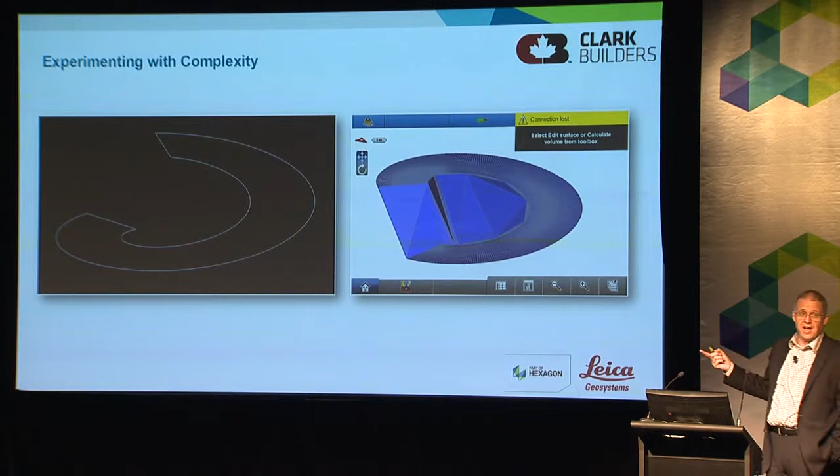Then he said, well, what if I made a model in Revit and then brought it out into the field, into the tablet and did that? And then he started — what I loved about this guy was, he could have stopped there. Then he said, wait a minute, what else could I do that would be really complex, even more complex than this? So he started just playing in Revit, making spirals and cants and showing that he could bring that out into the field, and he could lay out anything — no matter how complex a form he made, he could go lay that out in the field reliably.

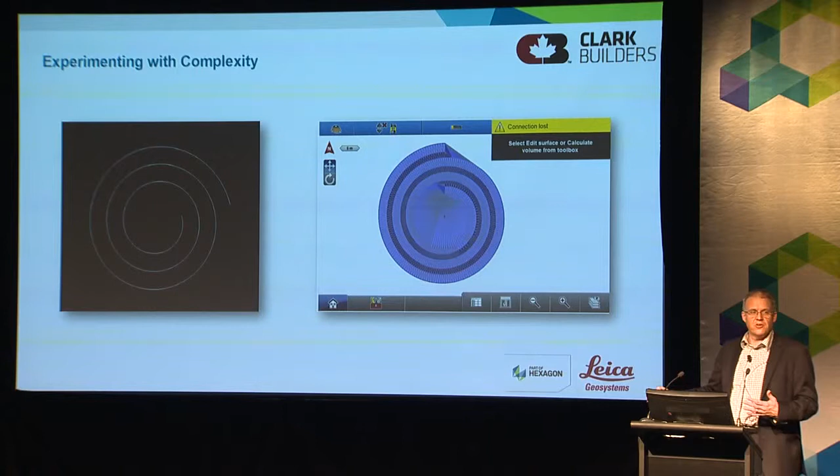And so what I loved about that was it's a workforce enablement discussion. It's not really a technology discussion. We have a guy that's got a scraggly beard, tattoos, all this, and he's out there figuring out how to do it for himself. Why wasn't somebody helping him get to that sooner?

And then the question for all of us here is this idea of pushing it to the field, of getting it simple, getting out there — why now? And it's back to the same discussion I think a few of us have talked about. And the why now of it — I like this quote from John Chambers. He said, and this is from 2015 at his user conference, he said 40% of the businesses are going to die in the next 10 years. They just are, if they don't figure out how to change their entire company to accommodate new technologies.

So I guess my challenge to you, and I hope you're listening to the other speakers that have come here this week, is that I would keep pushing forward now. Start to make this transformation. Start to think of what does it mean to your business model, your customer relationships, to become more digitized as you move forward. So thanks.